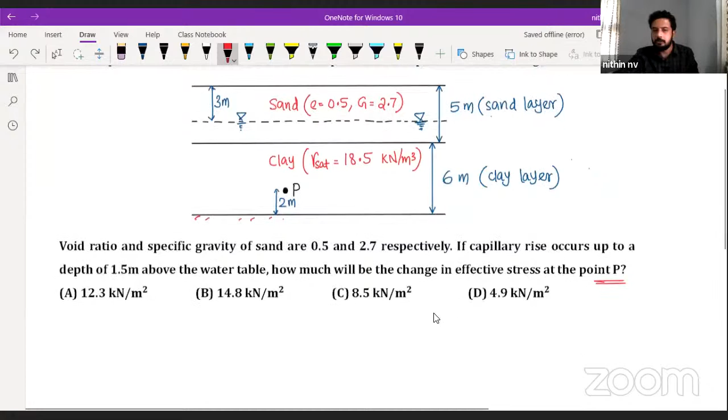Start solving it. So before capillary, no need to look at the screen, you can just solve yourself. Sigma Z is equal to - see, either you can simply put it as total stress minus pore water pressure, or directly you can put it. Or simply if I'm putting separately, you can just compare your step and understand where you made a mistake.

So gamma saturated we have to calculate now, gamma D also we have to calculate. For the sand layer, just calculate yourself. Tell me how much it is, everyone. Please tell me how much is gamma D. Can you please comment, everyone? How much is gamma D? Everyone please comment how much is gamma D.

17.65, okay thank you. So gamma W into G divided by 1 plus E. G value is given, E value is also given. So 17.658, okay. So which unit? Kilonewton per meter cube, na? In which unit you are substituting your gamma W, that will be the unit here. If you are taking 9.81, then kilonewton per meter cube.

Similarly, gamma saturated, what we have to do? G plus E divided by 1 plus E, na? So tell me how much is gamma saturated? 20, exactly tell me exactly. 20.928, okay thank you. Same unit, na? Kilonewton per meter cube, okay.

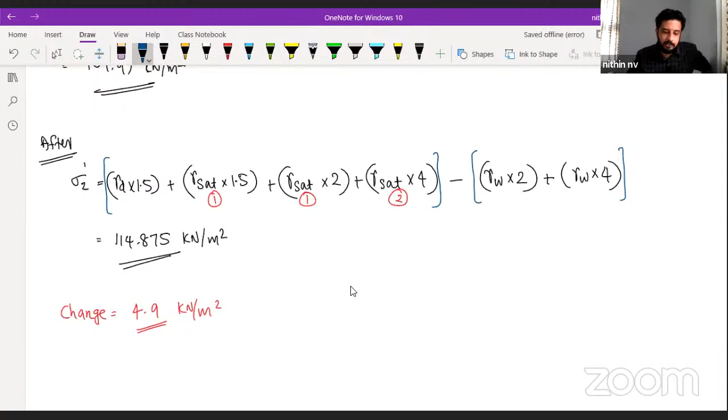What is the gamma W value? How much is gamma W? We have discussed in the first part, now not remembering. Unit weight of water - it can be 1 gram per cc, 1 gram per centimeter cube. It can be 9.81 kilonewton per meter cube. It can be 9.81 into, sorry, you can also put it in Newton, means into 1000, okay? That is equal to 9.81 into 10 raised to 3 Newton per meter cube. It can be 1 ton per meter cube. Anything you can substitute - only thing is in which unit you are substituting your remaining value, or in which unit you want the answer. That's it.

In the question, in the options, they have given everything in kilonewton and meter terms. So we are going to substitute - where is kilonewton and meter? This one, okay. So kilonewton per meter cube multiply with 1.5, and all is in meter. Meter cube and meter will get cancelled, we are going to get meter square. Clear? Okay, don't forget these things - very, very important thing. This is why I told the first part is more important. Foundation. Clear?

Okay. Very easy. So the only thing is, if they are not giving you the gamma D value or gamma saturated value, we just have to calculate from the given data. They may give the void ratio. See what this E and G are; I hope you already know. We have discussed these things in the first part, that's why I'm not discussing them again. E is the void ratio. G is the specific gravity. Using that, we have the equation. We have seen this equation before. Using the equation, we calculate it and substitute.

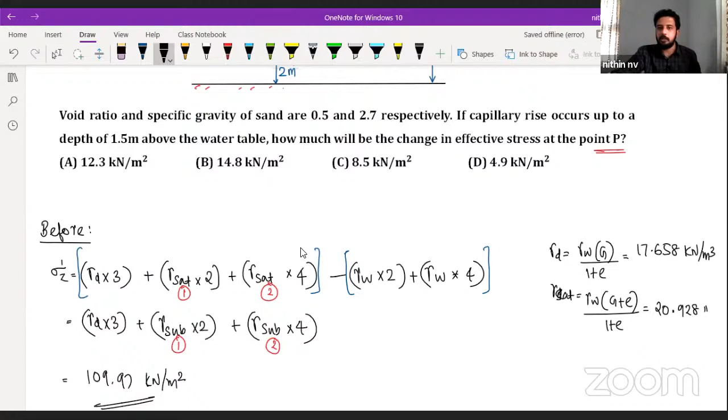Understood? Now see guys, if they are asking within the capillary rise portion, then what will you do? Right now they asked at this point P. At P, there is no capillary action. Capillary action is happening in that 1.5 meter portion. If they give you a point somewhere here, Q, or at the top, another point R, in that capillary region, if they ask what is the effective stress, then what do you have to do?

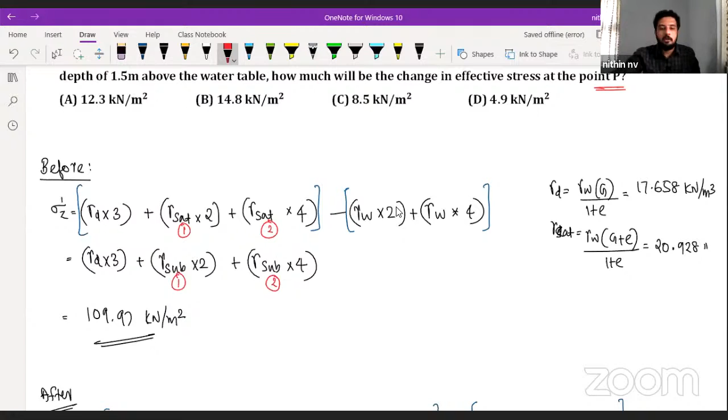Then you have to consider that portion in the pore water pressure. How much will it be? The pore water pressure will become negative. See, here it is a positive value. For example, you can do it as a homework; I don't have the data. Suppose this is the 1.5 meter depth, or in general, suppose this is the H value, that capillary rise portion. Now, if I draw the effective stress diagram in this portion, how will we get it? We have the water table here, just compare with the previous one.

Generally, we don't consider the pore water pressure above the water table. Here it was our P value, so we considered something like this: gamma W into 2 plus gamma W into 4, and that corresponds to P. Now, if they ask in this capillary region, sorry, I made a mistake. From here, here is our water table. We are going to extend this a little bit, drawing a pore water pressure here. It is on the left hand side, which means it is negative. Here the value is positive, 9.81 into 2 plus 9.81 into 4. Here it is negative, minus gamma W into H.

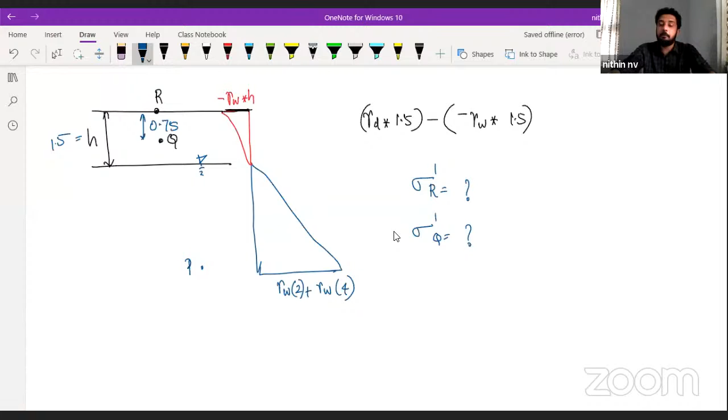Is it clear? Okay. Only in the capillary portion we are going to consider it. Clear, guys? But if they are asking outside the capillary area, we are not going to consider that portion in the pore water pressure calculation. Is it clear? Yes, very good. Okay. So I'm going into the next question. Yes. So let's see this question.

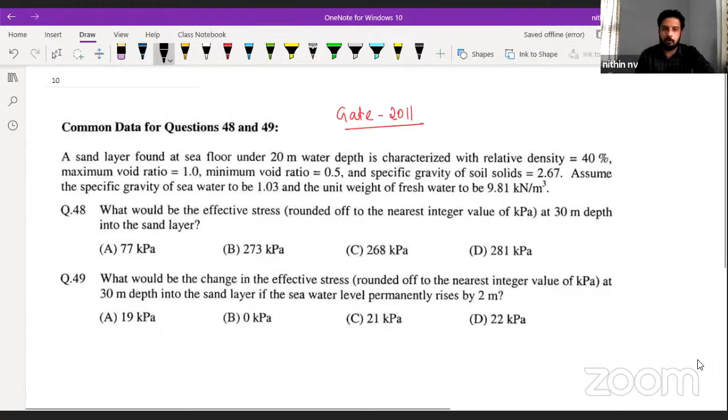No need to solve it completely. Just understand what is the change in this question. Everyone. What is the change? Is there any difficulty in this question if they are asking? This is actually a previous GATE question, GATE 2011 question. So we are not going to solve it. Just understand what is the change here.

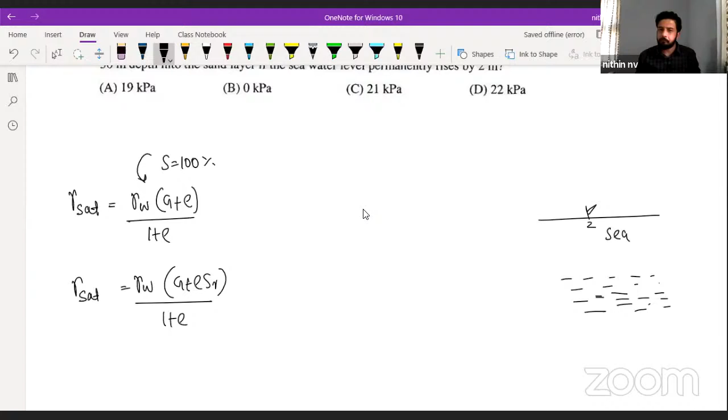If it is 100% saturation, if S is equal to 100%, the equation is going to be like this. So under sea water means what? We have soil here inside a sea, completely saturated. Then Sr is equal to 100% in this case also. What small change you have to make? If it is 100% saturation, gamma W into (G plus e), we just have to multiply with the specific gravity of that particular solution, let it be sea water, kerosene, whatever. You are going to get the answer.

Understanding? So if it is partially saturated, then also no problem. In this equation, you have to again multiply with the specific gravity. Now see guys, here we have to calculate the effective stress at 30-meter depth into the sand layer. Means we have seawater of so much depth. Here we have soil, this part is completely soil. They're asking what is the effective stress at 30 meters into the soil.

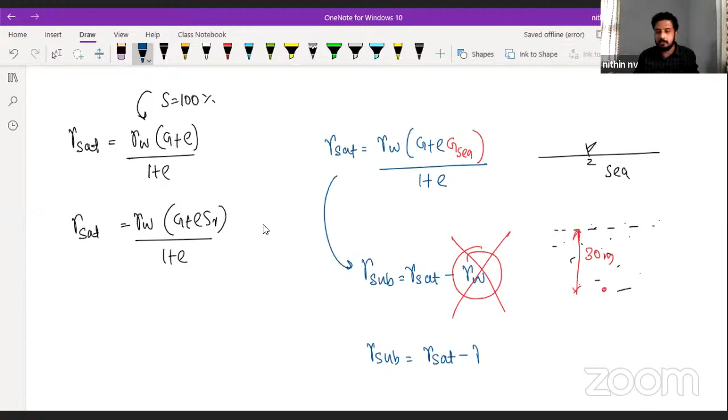So generally, at this point, we have to take gamma submerged into 30. The saturated value I told you. How can we calculate gamma submerged from this? Gamma saturated minus gamma W. Are you having any doubt? Is it clear? There should be a doubt because this is wrong. Why? We have already discussed that gamma submerged is equal to gamma saturated minus unit weight of whatever solution is there. So if it is seawater, we have to take seawater there. Is it clear?

In the sense, if you want to solve it, you can just quickly solve it and take the answer, no problem. What will be the answer? See, in this question, I told you before in the first part to remember relative density. So what they have done, they have not given the void ratio. Instead of that, they have given the relative density, maximum void ratio, minimum void ratio. From there, how can we calculate the e value?

Yes, everyone, tell me how much will be the e value here. Void ratio, everyone please tell me. We have already seen this equation in the first part. Those who missed the first part, you have to watch that first part.

Yes, very good. e is equal to 0.8. See, this is why I told you, you have to remember the relative density equation. Either they can ask you as a question, or like this, they can use that concept inside a numerical question. Clear? Yes, very good. I'm happy that all are commenting.

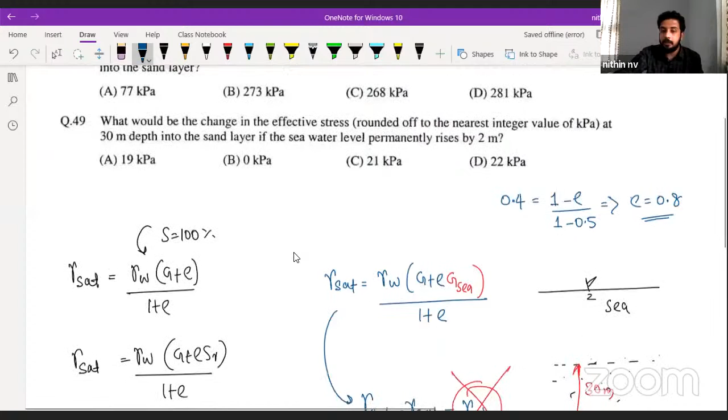Now see, we got the e value. Now how can we calculate gamma saturated? Just substitute and tell me how much gamma saturated you are getting. Everyone, gamma saturated is equal to, see here it will be gamma W, don't change that, G plus e into its completely submerged portion. So Sr is equal to 100%.

Then specific gravity. How can we calculate the specific gravity? They have given it in the question directly, I guess. 1.03. Specific gravity of seawater 1.03 is directly given in the question, last sentence. So tell me, if you are substituting, 9.81 into 2.67 plus 0.8 into 1.03, divided by 1 plus 0.8. Yes. So we are going to get 19.04. Thank you for commenting. This much we got.

Now tell me how much will gamma submerged be then? Gamma submerged is gamma saturated minus gamma of seawater. Tell me how much it will be? 19.04 minus, how to calculate gamma seawater? We know specific gravity of seawater is equal to unit weight of seawater divided by gamma W, unit weight of fresh water. Any specific gravity is like that. That's why specific gravity of water is equal to 1.

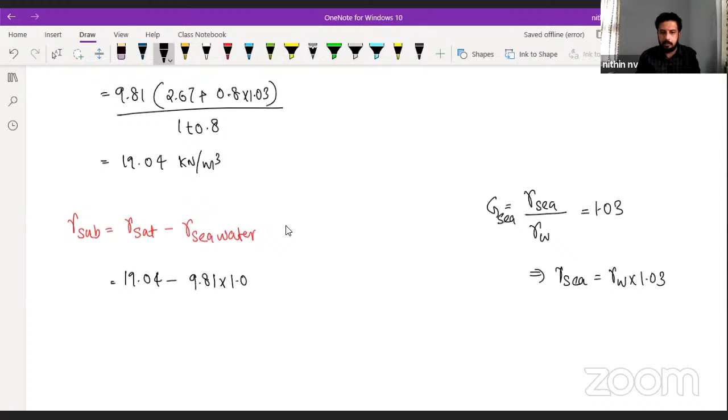That is given as 1.03, which means gamma seawater will be equal to gamma W into 1.03. So directly I'm putting it here, 9.81 into 1.03. So how much submerged unit weight are you getting? 8 point. Okay, thank you. Correct now? If you are taking 9.81, you are going to get the wrong answer. Vikash, properly check your answer. Something like 8.9, better you take the accurate answer. Is it clear, everyone? Kilonewton per meter cube.

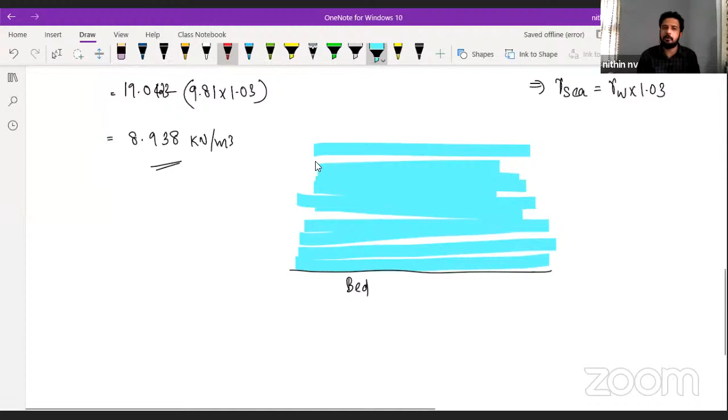Now, if they are asking about any water course, this is a very, very important point. For any water course, we will be having a bed level. Whatever be the depth of water, maybe the water depth is increasing again and again, whatever happens, whatever be your depth of water above the bed level of a sea or river or lake, what will be the effective stress at this location? Very good, zero. Very important point, can be asked. In this case also, effective stress at the bed will be zero. From here onwards, the effective stress is going to increase.

They are asking at 30 meters below into the soil. So how much will this answer be? Gamma submerged into 30 meters. Tell me everyone, how much is the answer? Very good, 268. 8.938 into 30. Are you getting approximately 268 kilonewton per meter square? Yes, very good. Now you understood how simple this question is. Kilonewton per meter square is equal to kilopascal. So option C is going to be our right answer. Is it clear, everyone? Yes, very good.

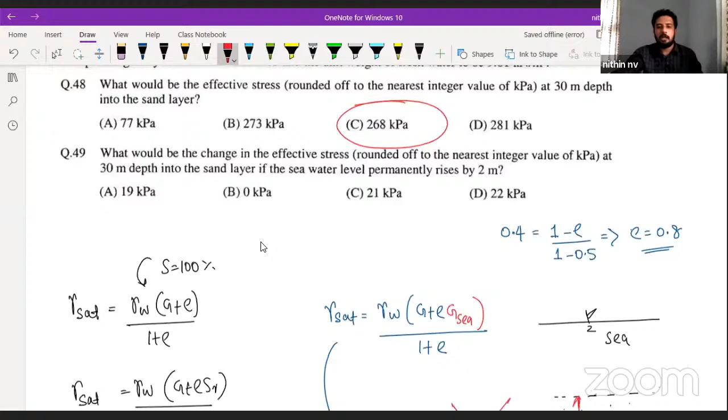Now you understood how simply we are going to calculate. They are giving something else. The actual procedure is lengthy; we have to calculate a lot of things and confusion will come. Now is it clear? Yes. Now tell me what is the answer to this second one. I have just directly snipped this question from the question paper. Tell me what will be the answer to the second one. Everyone please comment. Yes, very good. That's it.

Understood. So whatever happens in the water table, above the bed of the sea or bed of the river or bed of the lake, whatever happens, effective stress is going to be zero. That can be asked easily. Clear? Understood?

Now I'm going to give you another concept, something related to seepage and all. Just read this question and understand. Do you know how to do such question? This is another point where I generally used to get doubt. Just understand what we have to do. Please read the question properly, everyone, and understand what we have to do. I'm giving you a few seconds to understand the situation given in the question.

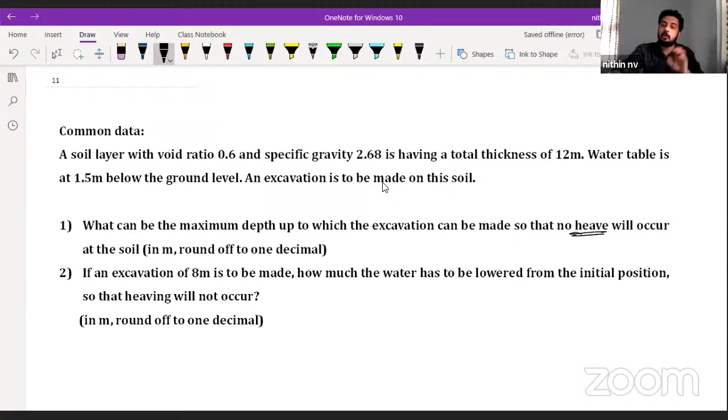Nothing, somewhat similar to our quicksand condition and all. We have to finally consider our effective stress concept - that effective stress is equal to zero. So if later the temperature increases, this water will melt also, somewhat related to freezing and thawing you might have studied. If you are seeing quicksand condition or heaving condition, just always remember we have to equate the effective stress equal to zero. This may not be due to seepage, this can simply be due to capillary action also.

So we are going to consider gamma saturated value and we are going to solve it. We can calculate it by taking gamma submerged also, but when calculating gamma submerged, generally students used to make mistakes. So I'm telling the simple thing - using gamma saturated, how can we solve such a type of question? This is a very important concept from competitive exams point of view. What they are telling - there is a soil.

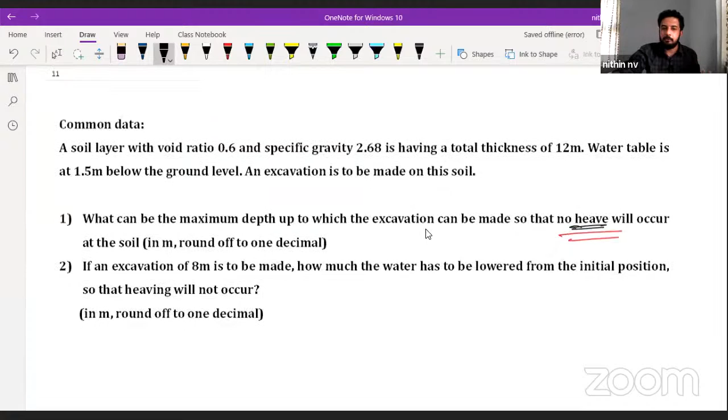In that soil, we have to make a dig, we have to make a dig. So how much we can excavate so that there will not be any heaving happening. So they are telling that it is a 12-meter thick soil. If I am simply drawing it, we have a 12-meter thick soil. So this is our soil. In this, water table is also there at 1.5 meters. If water table is not there, then we'll take gamma D and all. Simple as that. So 1.5 meter. Now what they are telling, we have to make an excavation.

If I am making an excavation here, somewhat like this, there is a chance that heaving may happen at this bottom of the sand. So right now we have sand like this. Till water table we have saturated sand. So this is sand only. Don't confuse with water table. Below here also we have sand, but we don't have sand here at this excavation portion. So here and all we have sand.

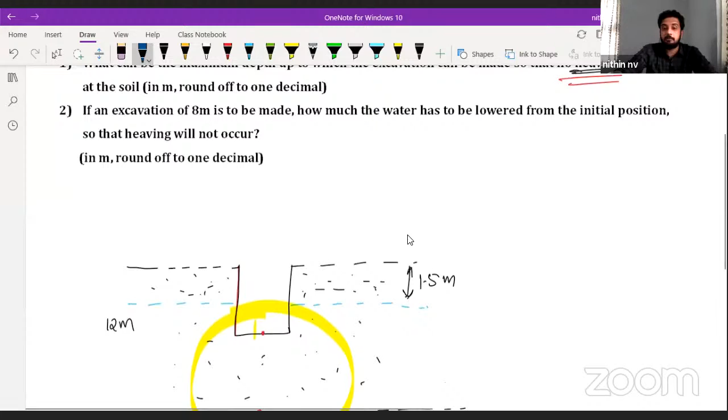Now see, if we are considering this point, how much will be the effective stress here? Exactly below the excavation, how much soil we have, that much portion we have to consider. So this is the portion under our consideration. Whenever they are asking how much can be the maximum depth of excavation, they will be giving you the void ratio, the specific gravity, whatever they are giving. We don't have to consider what is happening above or on the sides. Only just below that excavation portion, we have to calculate the effective stress. Under quicksand condition or heaving condition, at the critical location, we have to take gamma effective or submerged, and the effective stress is equal to zero.

Okay, so what we have to do, if I'm substituting 0, we just take the portion here. Gamma saturated into h minus gamma w into, how much will be depth of water table? I'm putting this as hw, height of water. Let it be the general case, hw will be equal to 0. But what we have to calculate is this depth of excavation. How can we calculate it? If you are getting this h value, 12 minus h is nothing but that depth. So do it.

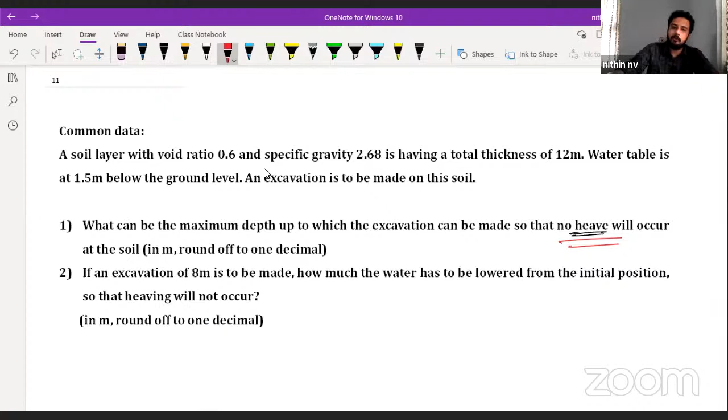Gamma saturated value we have to calculate from this. They have given void ratio, everything is given. So calculate it. Definitely that portion is underwater, under water table, so degree of saturation SR will be 1. Calculate gamma saturated and tell me how much it is. Tell me the gamma saturated value, everyone. Yes, very good, see, no need to calculate exactly how much it is.

Why? Because gamma saturated we know is gamma W into G plus E, when SR is equal to 1, plus E. You can simply put gamma W there, no need to calculate it, because gamma W is there here also. What I will get? Gamma saturated into H is equal to gamma W into height of water. Gamma W will get cancelled if I am substituting in terms of gamma W. Up to you. So tell me how much you are getting, everyone please comment.

Divided by 1 plus 0.6. If I'm simply putting gamma W there, I will be getting something like this. It's up to you, you can either calculate or put it like that. Into H is equal to gamma W into height of water table, which will be 12 meter minus 1.5, that is 10.5. Very good. How much? 5.1219. Okay, very good. So H is equal to 5.1219 meter. Okay, so is that my answer?

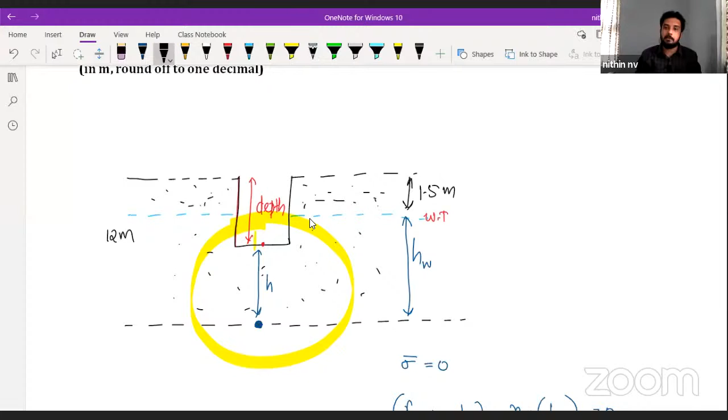Okay, so if they are asking, we can take gamma submerged, then also we can calculate, but finally you will get confused, so I'm not telling that. Simply remember, whenever they are giving a soil profile and asking what is the maximum depth up to which we can make an excavation. See, similar to this, there is another concept that we are going to study later: what is the maximum depth of unsupported excavation? What is the maximum unsupported excavation possible without any lateral support?

That we are going to study later in cohesive soil. There is a concept without giving any lateral support here, how much depth we can excavate. We have an equation like this: that will be equal to 4 into C divided by gamma root Ka. Like that, an equation we are going to study. Okay, that is different. That is what? Without any lateral support, how much depth we can make so that this soil will not come down.

You know, this soil will not come down, that is the meaning. Here, what? Here we don't care whether we are giving lateral support or not. Here we are considering for not happening a heaving process, how much should be the depth. So properly remember, okay, simply look at what is the maximum depth of excavation being asked. Don't go for a particular equation, check what they are asking. This is without lateral support, we are going to see that later, maybe in the next session.

And here it is, okay, I'm not rubbing it. Those who want, just check it. Now that is not required here, that is something extra point. So all are getting 6.8. Yes, very good, to discuss, okay. So many types of questions we are going to discuss in the coming time.

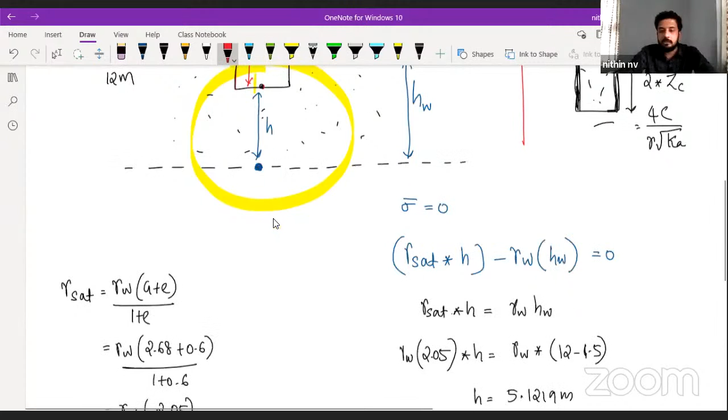6.878 meters. If you excavate more than 6 point something, what do we get now? Right now we have the maximum depth. If you excavate again, heaving will happen. The water will come to that location and finally problems will happen.

The soil will get collapsed, and the volume of the soil will increase. Whenever the temperature increases, it will melt, causing soil problems. If you construct a structure above this soil, the structure will eventually settle and fail.

Simple as that. Now in the question, we have to make it 8 meters, so something more we have to excavate. What do we have to do? Simply, we have to lower the water table, whether lower or higher, whatever it is. Actually we have to lower the water table if we have to dig more.

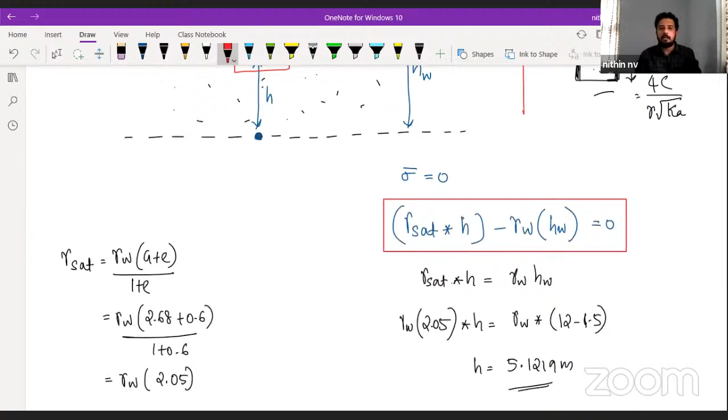So what do we have to calculate? If this depth is going to be 8 meters, how much should be HW? As simple as that, and we have the relationship. Remember the relation, it's very important. As of now, we have calculated H, and from H we calculated D. Now we are telling D is equal to 8 meters, so in this equation how much do I have to substitute for H value?

Vaishnavi, check your solution again, something mistake is coming. Tell me how much is H value, that might be the mistake. Everyone please tell me how much is H. Vaishnavi, tell me how much you substituted for H value. Is it 8 meters? No. Yes, very good, it is going to be 4 meters. So H is equal to 4 meters.

So gamma saturated we already got. Only thing is, instead of taking this 12 minus this thing, we just put HW there. So calculate HW, how much do we have to substitute? According to my calculation, I calculated like this: nothing but gamma saturated into 4 meters is equal to gamma W into, simply I'm putting HW. Everything I have, I just have to calculate how much is the height of water.

If I'm getting height of water equal to 8.2 meters approximately, yes, very good. Previously we had 10.5 meters from bottom. Now we understood it can be 8.2 meters, which means how much we have to lower using pumping out test and all. We have to lower by how much? The difference, how much is it? 2.3 meters, no? Okay, 8.199, yes very good, correct.

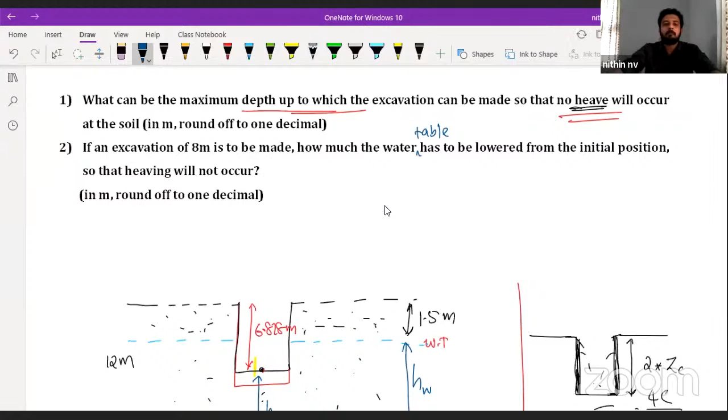So new height of water, HW, is equal to 8.2. So what is the question? The water table has to be lowered by how much? Now, how much the water table... so water table, okay sorry, water table has to be lowered. Understanding guys? Is it clear everyone?

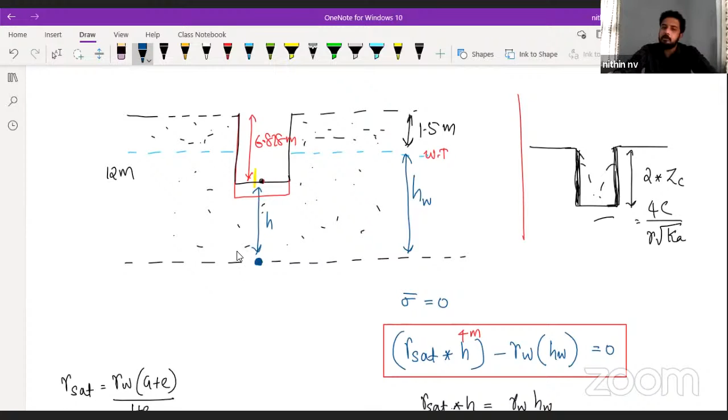In whichever point they are asking, they will ask like this only, say at the bottom of the layer. Whichever point they are asking, we can easily check what is the depth of water till that portion and what is the height of soil above that portion, meaning in that excavation area. If they give more depth or more layers, we can similarly calculate exactly the way we calculated in the effective stress calculation. Clear guys? Everyone clear? Yes, very good.

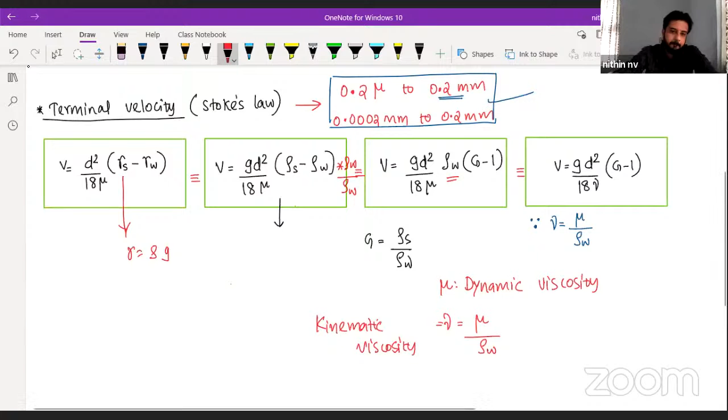If you simply multiply and divide this equation by rho W and rho W, what you will get: rho S by rho W will be our G value, and rho W by rho W is 1, so remaining is rho W only. Understanding, is it clear guys? Density, okay, not unit weight. So here only we made a mistake, and the fourth one was absolutely correct. Clear? Those who have seen the first part, is it clear? Those who have not seen it, in the first part, at the last portion when we were ending the session, I was telling you to check this, okay?

Okay, clear? Yes, those who missed the first part, don't worry, you can watch it later. Now let's go into the next question, one second. Yes, take this question everyone, understand what to do. Everyone, please read the question properly and understand what to do.

Hope you know the concept. Try to do it. After some time, I will explain. Start solving it, everyone.

Okay, can I solve? Okay Gurusaj, don't worry, we are going to make it clear. Don't worry, okay?

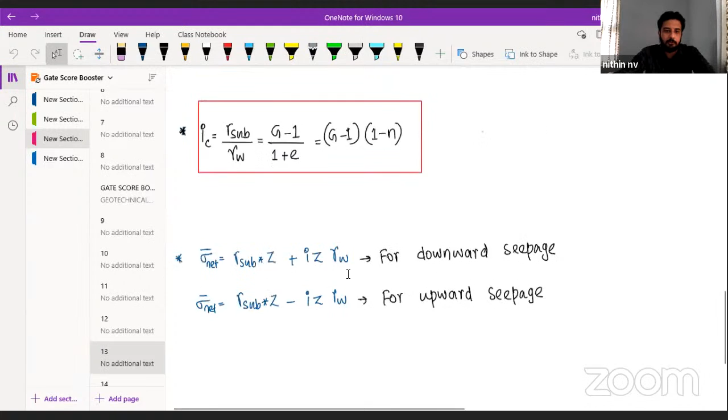Now K is nothing but... okay, let me see whether I have written all the equations or not. After this I will show you some other equations. One second, let me check... okay, no, I will tell you later.

Hope you understood. One second. Okay, let it be, I think my system got some problem. Okay, let it be, one second guys. Give me a second, please wait.

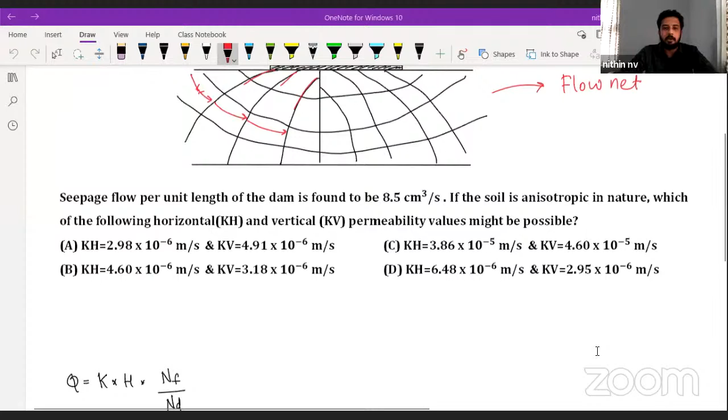Yes, I hope you can see the screen now, right? Okay, now see what you have to do. You just have to count how many drops are there. We got that equal to 9. How many flow channels are there?

Flow channel means what? That space in between the lines. How many are there if you check below? We have 3 lines. 3 lines means how many flow channels will be there? 1, 2, 3, 4 - 4 spaces. Are you getting it? Yes, very good. NF is equal to 4.

Clear? ND means how many drops are there? You have to count all the lines till that last horizontal portion. Flow channel means in between those horizontally going lines, how many spaces are there? So 1st space, 2nd space, 3rd space, and 4th space. So we got ND is equal to 9, NF is equal to 4.

Okay, so till that we can directly substitute. Now K is given - K is not given in the question, we have to take it from the options. We don't know right now what it is, but it is given in the question that the seepage flow is happening, which is equal to 8.5 centimeter cube per second. So the answer is already given. We have to calculate the K value there.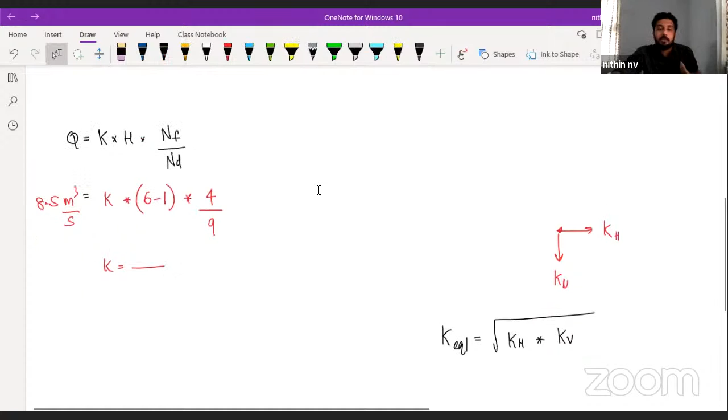Now we have to calculate how much will be KV, how much will be KH. How can we calculate? That is the next concept, and that itself can be a 1 mark or 2 mark question. For an anisotropic soil, the equivalent permeability is equal to root of KH into KV, as simple as that. But from this directly we cannot know or calculate what is KH and KV. What you have to do for such a question is, whatever value you calculated for K, then you check all the equations and see which equation is satisfying. That's it.

Now one thing, you have to properly check the unit. Here all the units are given in meter per second only, so this K is in meter per second, this H is in meter, so the Q value we are going to get is in meter cube per second per meter, actually meter square per second. The meaning is discharge per unit length, that's why meter cube per second per meter. If you are checking the unit, meter square per second it will come.

Clear? Now you just tell me which option is correct. Tell me which option you are getting correct. Yes, getting the answer, which one?

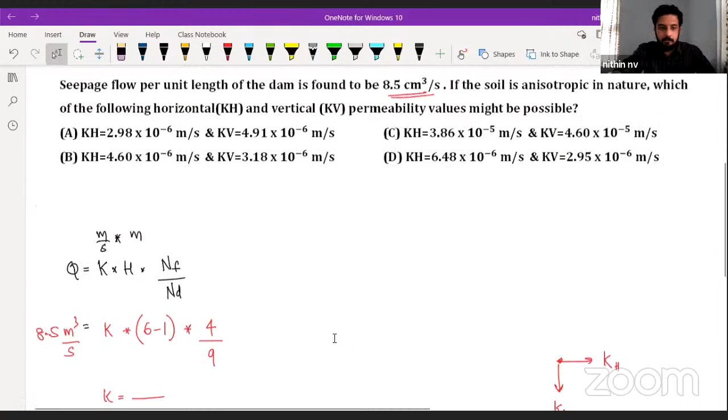A and B, is it? No, which option is correct? Are you getting A as answer? Seriously? Let me check for 1 second. I don't think you will be getting A.

Everyone please, how much are you getting for the K value? Can you please tell me? Okay, we'll check, don't worry. K is equal to 3.825 something. Are you getting 3.825? Okay, very good. So K value is equal to 3.825 into 10 raised to minus 6 meter per second. Okay, if you are getting A, okay, let it be there.

Now tell me, is there any other option? See, it can be MSQ, na? Which of the following is possible, that is the thing, na? So it can be that more than one answer is correct.

So you check it, properly calculate everyone. Those who are telling it is C is also correct, properly check into 10 raised to what? That is also important, guys. 10 raised to what? Okay, so this is wrong, into 10 raised to minus 6 is also there. If you are taking C option, properly check it, into 10 raised to minus 5 it is.

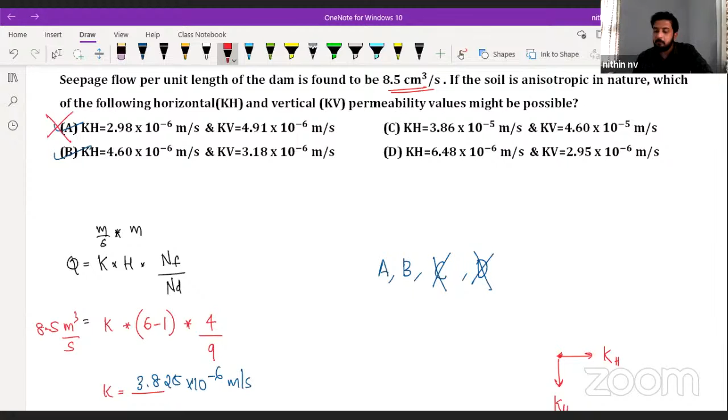Always remember, whenever we have an anisotropic soil, KH value will be always greater than KV value. This is very important point. We have KH value, the coefficient of permeability in the horizontal direction. We have KV value, the coefficient of permeability in the vertical direction. For an anisotropic soil, always in the horizontal direction, it will be more. So if you are checking option A, KV value is more than KH.

This can be something tricky that they are going to ask. So I just wanted to let you know that concept also. That's why purposefully I have made that option. Clear? See, these are the portions you have to take care. They will just try to make some tricky question to make you deviated. So now the only option which is going to satisfy the values and KH greater than KV will be option B.

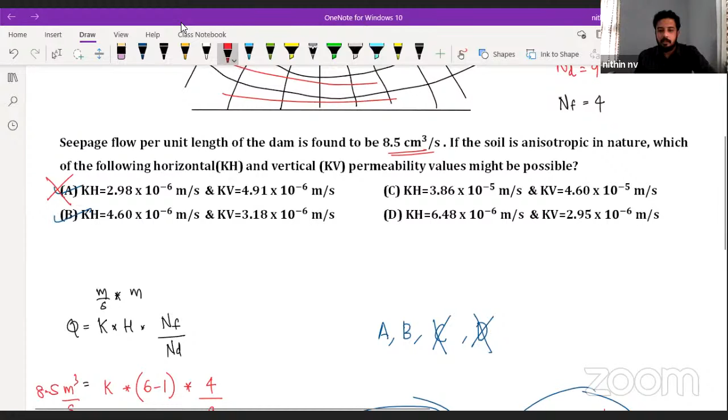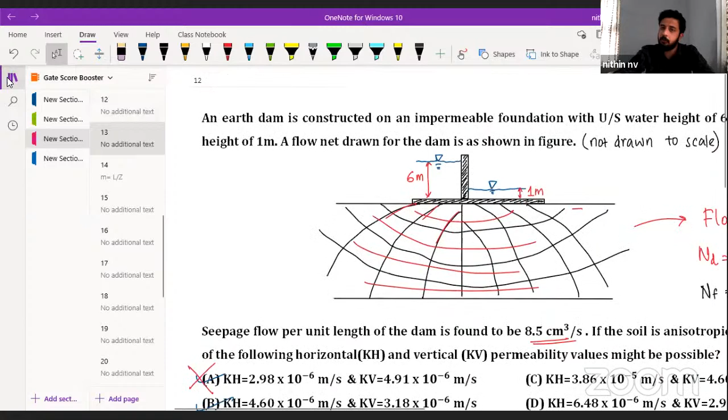Clear? So our only answer will be option B. Henna? Are you clear or not? Yes, very good. Understood? So this is one simple thing which you have to remember. Now I'm just showing you some equations that you can easily study, very easy thing.

Now suppose there is a soil layer and water is passing through it. So we have a coefficient of permeability value. We can easily take the flow Q is equal to K into I into A. You might have studied it many times in college exams. If we have more than one layer like this, then what to do? This K value will change. We have to take an equivalent K value.

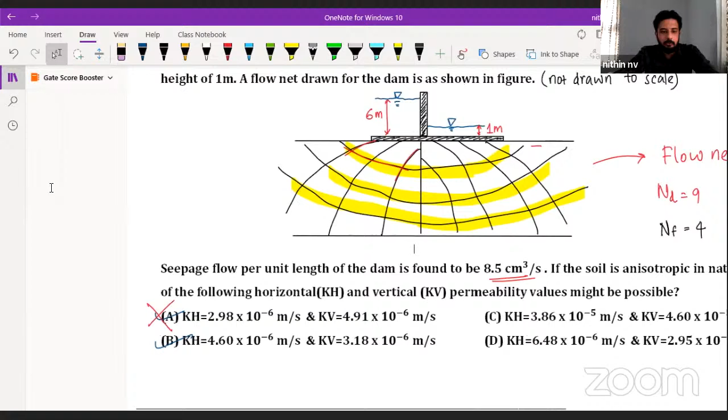Then there is an equation like this: K equals C D10 square E cube by (1 plus E) into gamma W by mu. The very important thing is, if they are giving you a particular soil, obviously void ratio and D10, also known as effective size, are fixed. C is a constant. These are soil properties, and gamma W by mu is nothing but the

fluid property. If it is water, then water. If it is kerosene, then kerosene, like that. This is water property, or we can simply say fluid properties. This is soil property. So for a particular soil, K will be directly proportional to gamma divided by mu.

Instead of gamma W, I can simply put gamma. If it is water, then gamma W. If it is kerosene, then gamma of kerosene. If it is seawater, then gamma of seawater, like that. Clear? This is not gamma of soil. This is the gamma of the fluid. So this you have to remember.

They can ask, if you are taking a different fluid of different viscosity, and they can give you gamma correspondingly, what will be the coefficient of permeability. Then using this equation, you have to calculate the K value, if you don't have any other data.

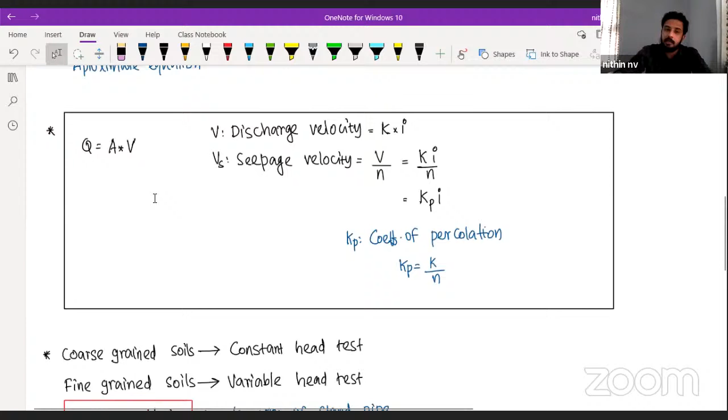This is something we have already discussed. Q is equal to area into velocity, I told you in hydrology. Discharge velocity is K into I; seepage velocity is discharge velocity divided by porosity. They will give you the void ratio, or the relative density, from which we calculate the void ratio and then porosity and substitute here. Like that, they can ask you a 2-mark question.

Now if they give two points and ask how much time a tracer, a water particle, will take from location A1 to B1, with the distance given, we know time is equal to distance by velocity, because velocity is equal to distance by time.

Which velocity we have to take? Should I take discharge velocity or seepage velocity? Everyone please comment. Very good, seepage velocity we have to take. That is very important to remember.

The same thing they can ask in hydraulics also; I told you this there, I guess. Yes, Krishna Kasturidas is already giving the answer. Very good. Inversely proportional we used to take. I will tell you later.

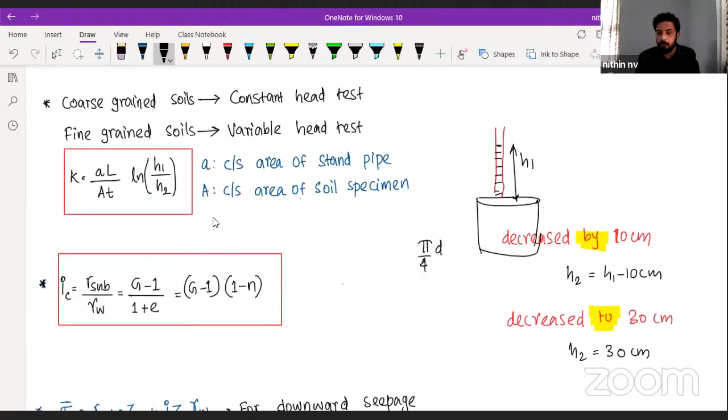Then small a and capital A, they will give in the question. Definitely the capital A value will be bigger; we have the soil here of bigger diameter. Either they will directly give the area, or we can calculate it by pi by 4 d square, if they are giving a cylindrical specimen. Length they will give in the question itself. We can properly substitute everything.

Remember, it is natural logarithm. Or somewhere you will be seeing the equation 2.303 aL divided by capital A t, but then it will be log H1 by H2. That is also the same. Don't get confused if you see an equation using 2.303; both are same. Clear? Shape factor is nothing but related to D10 and C. And also we have C, a constant which takes care of the soil properties. Clear?

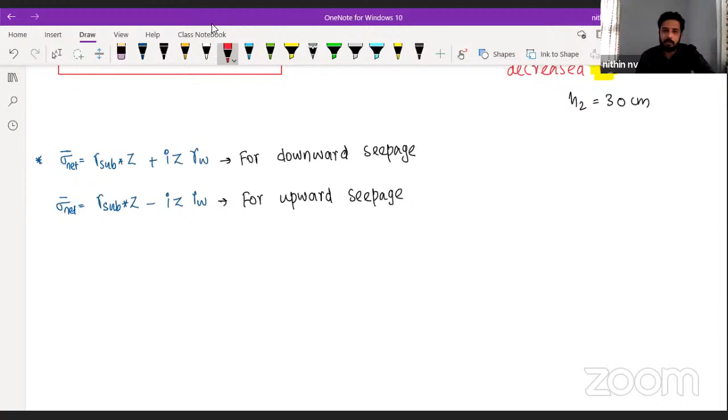Now, this is the downward seepage and upward seepage. Very simple thing. Maybe in last year's GATE score booster session, sir solved a question based on this equation also. You can just practice; as of now we have already calculated this, that's why I'm not explaining too much. Simply a direct equation. Only thing is, for downward seepage we have to use a plus value. For upward seepage, we have to use a

minus value. Suppose we have a soil here. If you are connecting two piezometers somewhere, we'll be getting two heads. Suppose some head we are getting like this. The difference between these two values is nothing but our head loss. So if this is your head loss HL, and this is the length you have traveled, the hydraulic gradient I is equal to that loss in head divided by L.

That piezometer we can keep anywhere, at top or bottom. We assume the I value as a constant value. So wherever you are connecting, you just check the difference between the piezometer levels, and divide that value by the length between the connected points. So you are going to get I. Sometimes the bottom portion will be higher; it depends on the flow.

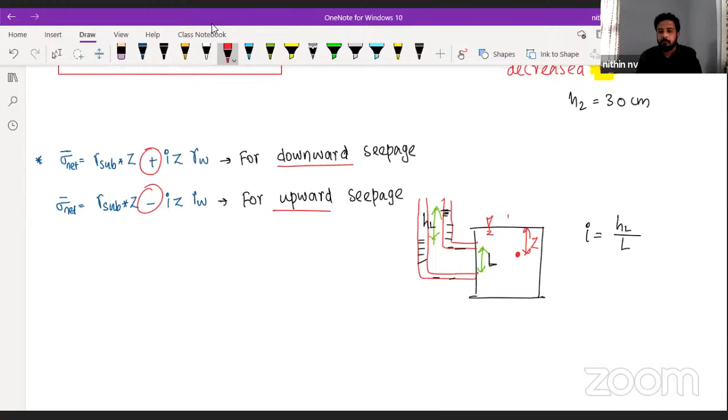If they are asking at any point Z meter below the top of the soil layer, and seepage is not there, we know the effective stress is gamma submerged into Z. Now if seepage is happening, if it is downward seepage, then we have to put plus I into Z into gamma W. If it is upward seepage, we have to put minus. That is why we are getting a quicksand condition sometimes.

We get a quicksand condition whenever sigma dash is equal to 0. So if they are asking at what depth quicksand condition is happening, we can simply equate this equation and calculate it. Clear, guys? This is once again gamma submerged into H.

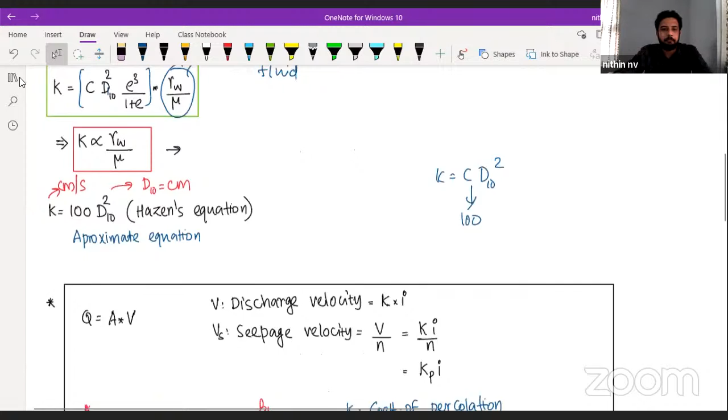That covers the things we have to check under permeability and seepage. Before showing the next question, I will give you some points, and after that we can go to the next question.

Next concept is stress distribution. Whenever we have a point load, we have two equations: Boussinesq equation and Westergaard equation. In the recently updated syllabus, they have removed the Westergaard equation part, so this time they may not be asking it. At least remember it's simply the equation changing - instead of 5 by 2, it will be 3 by 2.

And instead of 3 by 2 pi, it will simply be 1 by pi. There's also a slight deviation in gamma Z that you can check. But this time they may not be asking it - generally they don't ask the Westergaard equation, only the Boussinesq equation. They may not even mention it's Boussinesq - they will simply ask, and by default we use the Boussinesq equation.

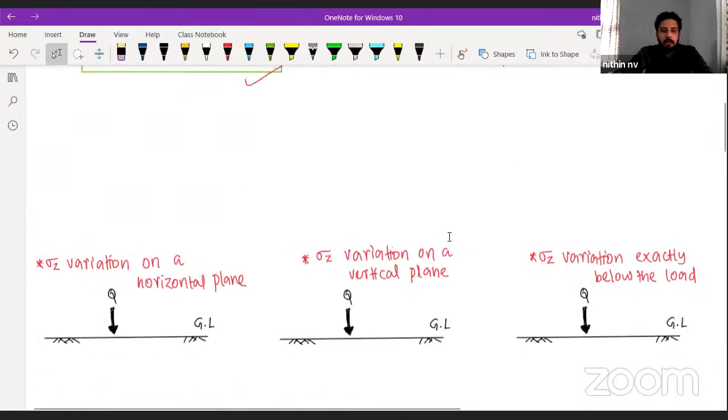Now this is not that important, simply listen. If you take a particular horizontal portion at Z meters, the variation as R value changes will be somewhat like this - you get the maximum value at R equal to 0. As R changes, the sigma Z value keeps decreasing. Contact pressure, I will tell you that also, please wait.

This figure they can give as an option and ask you what is the exact figure - like in transportation where we studied the Marshall graph. They can simply ask which of the following is the correct graph representing the vertical stress, sigma Z, variation on a horizontal plane - meaning Z value remains the same but R value changes as we move left and right.

Now, sigma Z variation on a vertical plane means you keep the R value constant. Suppose I take a particular R value - applying the load at a sidewise distance, and throughout that vertical line downward, I check the variation.

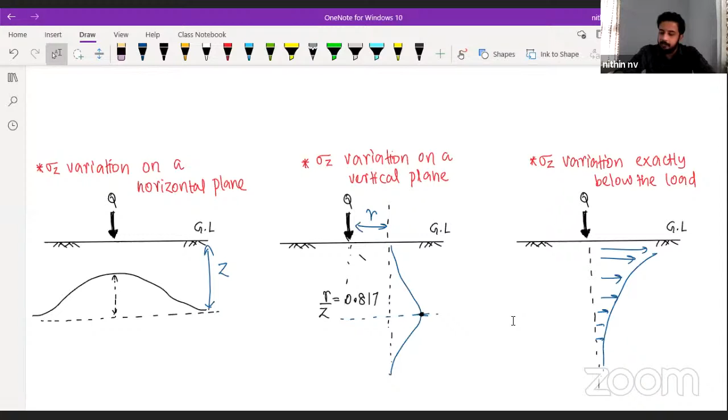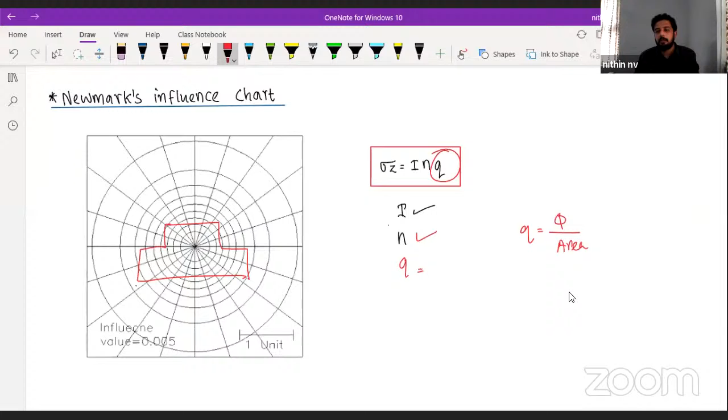Only the unknown portion will be this Q value. Either they can give some load, or they will give the area of the footing, so Q by area, you will be getting the intensity value. That's all, a very easy thing that you can easily substitute.

How are we going to calculate Q? They will give it in the question, or they can give the load value, and we can divide by area to get the Q value. This I value we are going to take from a particular table, which I will explain through a question. Clear? Now we will do a question.

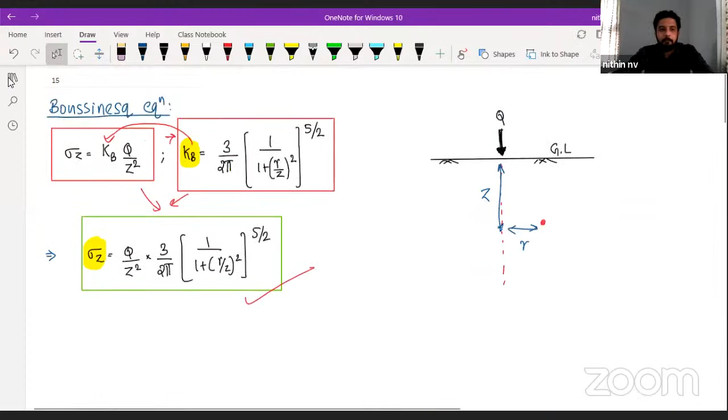You just take this question, yes, do it. The circular equation I have already told you; just check the circular equation and substitute it, and tell me how much you are getting for the circular case. Properly check the question, what we have to do, and tell me how much you are getting for the circular one.

Substitute the equation. Either you can use that 1 minus cos cube theta, or you can directly substitute in the other equation.

First you calculate the circular one and tell me what is the answer below a circular loaded area.

Very good, very good, Krishna. See, what will be the Q value, everyone?

What will be the small Q value? 4 meter dia, na? So 4 meter diameter means dia is 4 meter. What will be the Q value? Load is given as 1500 kilonewton. Intensity of loading it is, na? So pi by 4 d square.

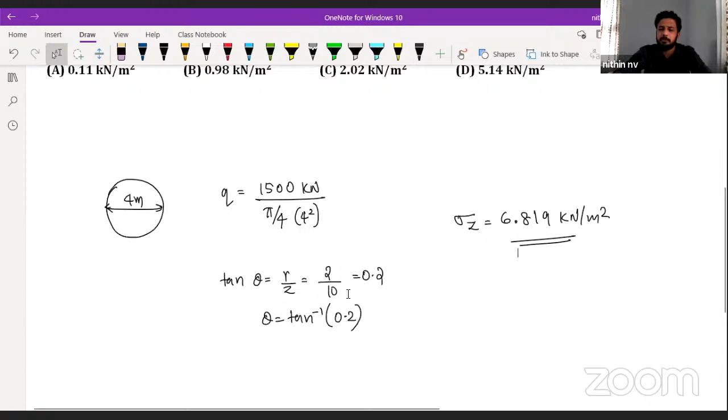Yes, either you can do with that equation or the first equation, anything, both are going to give you the right answer. But in online calculator, it's better to do using the theta equation, otherwise so much of brackets and all you have to put.

Okay, now coming to this is what I told you. What they have given: the foundation is, first of all, we have a circular diameter foundation. Later we are replacing with a square foundation of 4 meter side, which means it can be either rectangle or it can be a square to use that particular equation which I have shown you last. So everywhere it is 4 meter. Now what we have to calculate, they are telling at the center at a depth.

So if I'm just drawing like this, as of now we know only one thing: at the corner, at a particular value of z, we can calculate. Now they are asking at the center, at the value of z - what to do? What we can do? If they are asking at the corner, directly we can apply the equation. If they are asking at the center, what we can do?

We can split this square into 4 different squares, so that now this point is going to be below the corner of 4 different small squares. Understanding, guys? If I am splitting this square into 4 different parts, okay, either it can be a rectangle or it can be a square. If I am splitting into 4 different parts, what we are getting? Now that point has become at the corner point of 4 different squares.

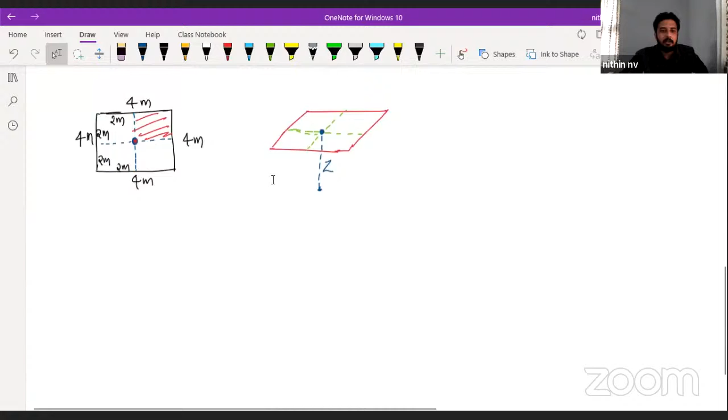Length by z? For each rectangle, this is 2 meter divided by 10 meter, that is 0.2. Similarly, breadth by z: B by z is also 0.2 because it is a square. If it was a rectangle, we would get a different value. We don't care which is m and which is n. So here we are getting 0.2, 0.2, corresponding to 0.2, 0.2.

Which value do you have to take? Yes, the first one. By mistake, don't take 0.4, 0.4. Because we have already split it.

Now remember one thing: if the m value is, for example, 0.5, and n value is 0.2, you need that combination's answer. For example, this is what you require in the question, but it is not available as such. They have given 0.2 and 0.5. Let it be any combination they are giving, then what will you do?

In the question, suppose we require a combination of 0.5 and 0.2, we need that influence value, but it is not given directly; instead they give a 0.2, 0.5 combination. Then what will you do? Will you take 1 minus the given value, or take it as it is? Will you interpolate? Don't do anything. This combination only you have to check.

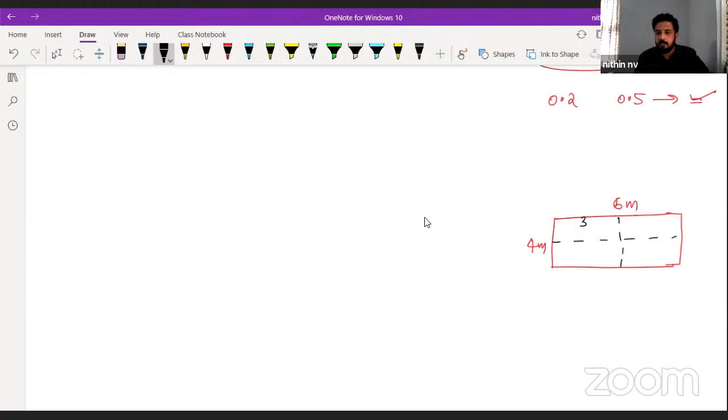If they are giving a table, for example, there is a rectangular area, this is 6 meter, this is 4 meter. Now if you are splitting it, what will you get? This has 3, this has 2. Now suppose that is equal to 10 meter, what we require is the combination of 0.3 and 0.2. We require this, but in the question they have not given this directly; they have simply given a combination like 0.2, 0.3 equal to some value, say 0.02 something, 0.231.

Then what do you do? No need to do anything, simply take it as it is. The M and N combination only you have to check. This may not exactly be this value; there is a particular predefined value for all the M and N combinations. We just check the M and N combination.

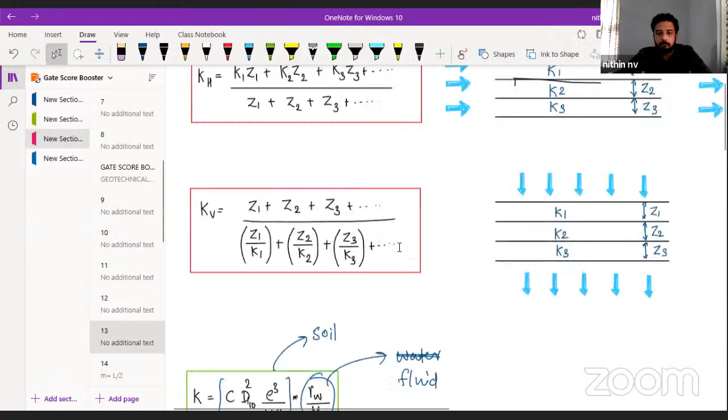So here it is 0.0179. Substitute there: sigma z is equal to 0.0179 multiplied by I into Q, using the equation we already wrote. I showed you where it is written. I into Q, the Q value we already calculated as 1500, divided by area.

Now tell me, what is the answer for area? Is it pi by 4 d square? That's it, now it has become a square, right? So as of now, what did we calculate? Yes, 16. And the Q value. Now what do we need to do, guys?

What will be the intensity of loading? Should I take 1500 divided by 4, or should I take 1500 divided by 16? Which is correct? Don't make a mistake, don't take 4. It will be 16 only, okay?

Because the total area is 16 meters square, and our load of 1500 came on this 16 meters square. So what will be the intensity of loading here? It will be 1500 divided by 16 meters square. So everywhere on this 4 meter square small rectangle also you are getting the same intensity.

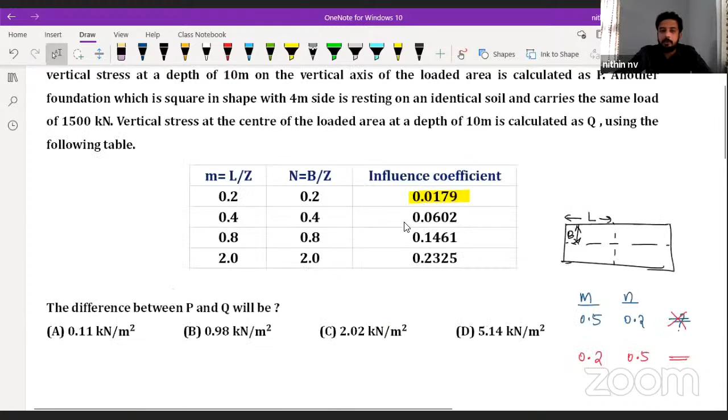But here, whenever it is at the center, whether it is a rectangle or a square, we are getting the same portion for each. So directly what can we do? Our sigma z value will be equal to - no need to add it separately - just multiply with 4. That's it. Are you understanding, guys?

Now tell me the value, sigma z. Multiply with 4 and tell me. 6.7125. Okay, thank you. 6.7125 kilonewton per meter square. Right.

Getting it? So what is the question? What is the change? What is the change that happened? It was 6.819, now it became 6.7125. So how much is the change? It is 0.107.

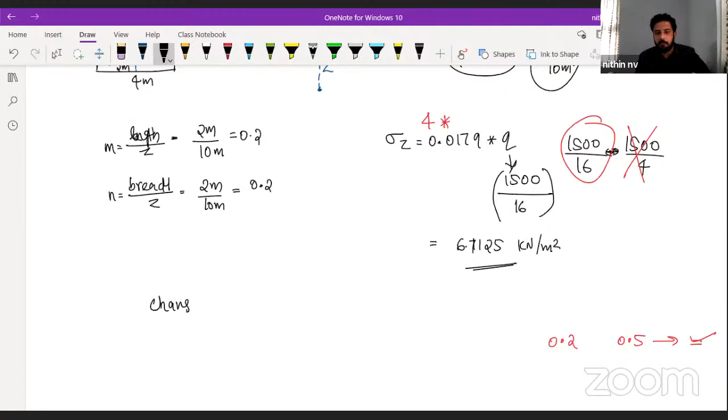Huh? 0.107. Okay. Kilonewton per meter square. That's it. There is a small change only, na? Yes, 10 something. So which option I have to select? Which option I have to select? Yes, very good. Option A. Clear? Is it clear, everyone?

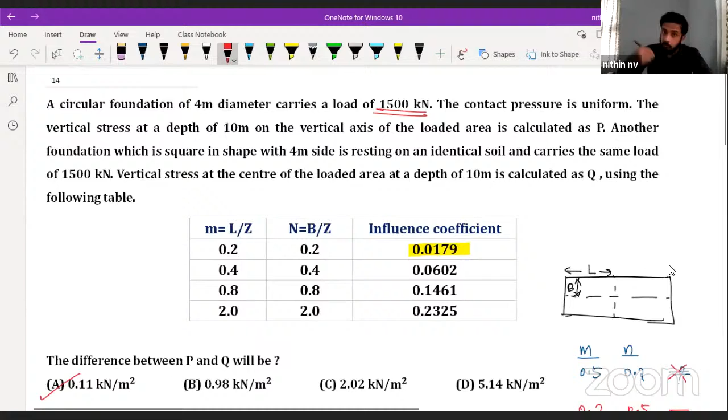Properly check it, okay? The only thing they can make here is one thing is by like this. I have already given you the load. If they are giving you the intensity, you may not make mistake. But if they are giving you the load, you may make mistake here. Okay, so by dividing, take the total area. That's it. That is the only thing.

Then if it is a square, then the combination only you just check M and N. If they are giving opposite, then also it will be the same value. Clear? Right. So those things you remember. Now, yes, take this question.

One second, before going into the question, I will just show you the equations of settlement and everything. I will tell you, contact pressure, those things I will show you. Just take a screenshot. I hope you have already studied consolidation. There are important equations. We are going to use these equations in the question. If you want, you can just take a screenshot or just go through these things. Again, I will take these equations and I will show you this.

For ultimate settlement, we have different equations. Any equation you can use. If they are giving you the coefficient of volume compressibility, we can use the first equation. If they are giving you the change in void ratio, total thickness, initial thickness, this H is nothing but the initial thickness. Okay. Then also we can use the different equation and calculate what is the final settlement. SF, I mean SF by settlement final.

Okay, final settlement. Sometimes in the material you will see delta capital H, or you can use this equation H into CC. CC is nothing but compression index. Compression index is nothing but if you are actually increasing the effective stress, void ratio decreases. We are going to get a curve like this. If you are taking the slope, somewhere E2 minus E1 divided by effective stress sigma dash 1 minus sigma dash 2, we are going to get this guy. Okay, nothing but coefficient of compressibility. This is not coefficient of consolidation. This is coefficient of compressibility.

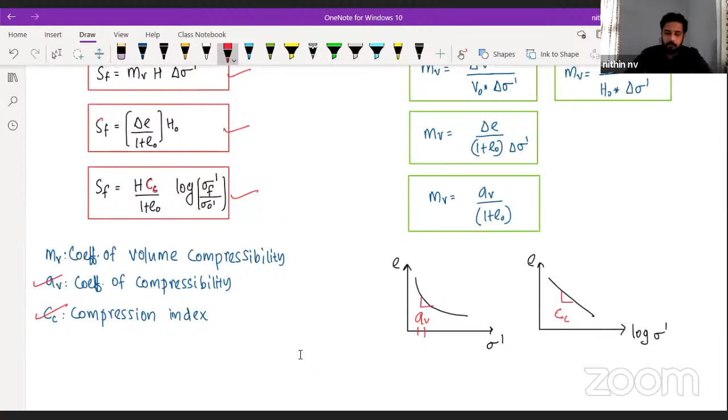If CC value is not given, either they can give a graph like this from where we have to calculate, or they can give that it is a remolded clay or undisturbed clay, from where also we can calculate. I'm going to give you a question, you will understand. Okay, so these portions also you remember. Either they can give you the AV value, E0 value and all, and they can ask you what is the final settlement if the increase in effective stress was this much. Okay, we can easily calculate.

Now here I have written sigma final by sigma initial. Effective stress, this is final means what? The sigma F value I can also write as the denominator value plus change in effective stress. Initial value plus change in effective stress is nothing but final value. So these things you remember, we are going to use this.

Then a very important thing, time factor, which is denoted by TV, T suffix V, time factor. Equation is same, CV into T by D square, where CV is nothing but our coefficient of consolidation. T is nothing but the time that we are taking. D is nothing but the drainage path. Very, very important thing. I will tell you when we are discussing the question. Okay, let it be there.

CV value, if they are not giving, CV is what? Coefficient of consolidation. What was coefficient of compressibility? That was AV that we have drawn in the graph. This is coefficient of consolidation. If they are not giving, coefficient of permeability divided by MV.

We have seen in the previous one: mv, coefficient of volume compressibility, into gamma w, nothing but our water. So this equation is the same for any degree of consolidation, and you can equate it to another equation. What is that equation? If the degree of consolidation is less than or equal to 60%, we have a very simple equation, pi by 4 U square.

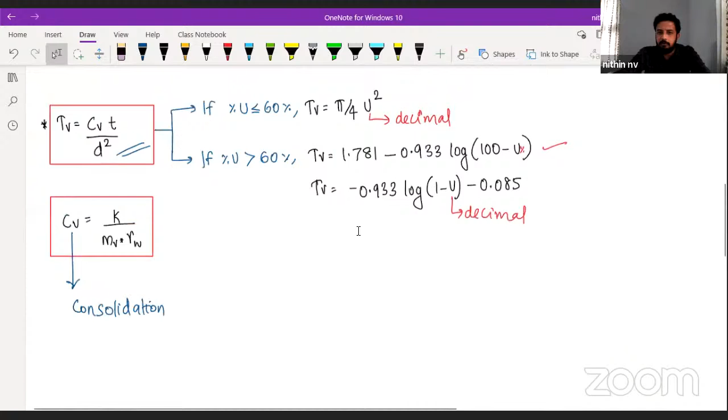We can do a question now. Using the question we can understand the equation in a better way. So you just take the question, understand what is given. It's a lengthy question, so I have split it into 3 parts. Each part can be a 2-mark question, like that. Properly go through it and understand what we have to do. I'm giving you a few seconds to understand the question.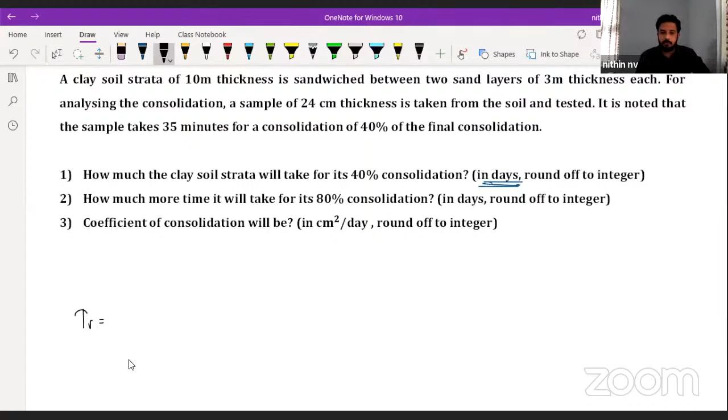We have to calculate the time. So whenever they are asking how much time it will take, means in days, how much time. In consolidation, whenever they are asking how much time it is taking for some particular degree of consolidation, always remember we have only one equation for calculating the time, nothing but Tv. Yes, very good. Tv, what is the equation?

Cv t by d square. So if they are asking how much time it will take, either they can give you the Tv value, d value and Cv value, then ask you the t value. Or they will not give you the values, and from the given data we have to calculate. Now, they have not given the time factor in the question, no? Are you seeing any time factor equal to 0.1, something like that? Nothing. Now, either I can use the pi by 4 U square equation, or I can use the second lengthy equation.

Which equation can we use? Very good. It is 40% consolidation, which means it is the first one. Tv is equal to pi by 4 U square, as it is less than 60%. So tell me how much you are getting for the Tv value? 0.1256. Okay, thank you. So we got the left hand side: 0.1256 is equal to Cv t by d square.

Now, if they are asking how much time it may take for 70% consolidation, then it is greater than 60. We have to use the other equation and calculate the Tv. Clear? That is how we are using the Tv equation. Now, this right hand side is common for any degree of consolidation. Cv t by d square is common.

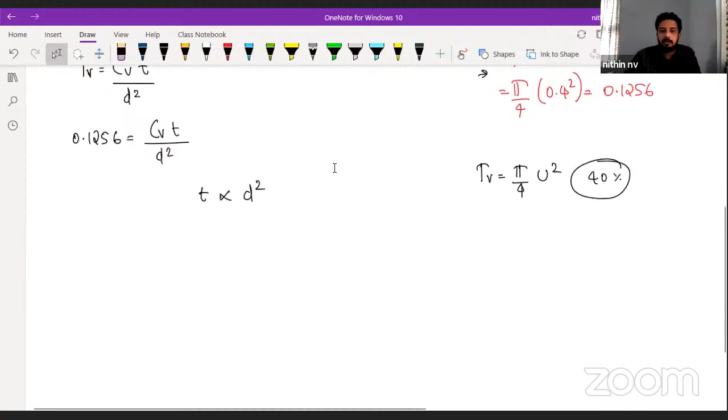And what is remaining? T and D are remaining. What will we be getting? T directly proportional to D square. Clear now? Now what have we taken? A 24-centimeter sample. Now look at it. What are they giving? We have a clay layer of 10 meter, with 2 sand layers of 3 meter thickness.

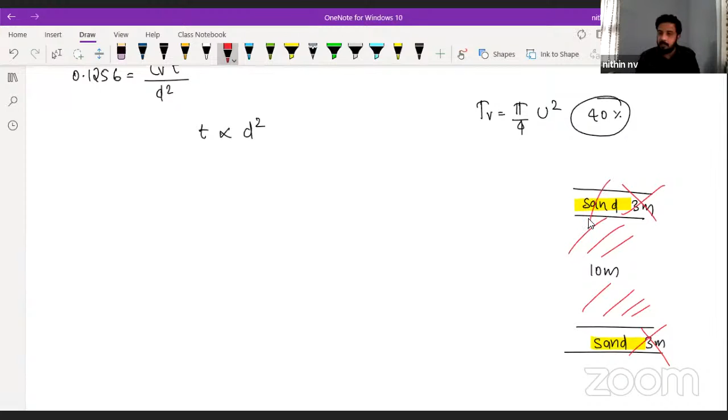A 10 meter clay layer is there, and we have sand here which is 3 meter, and sand here which is also 3 meter. Where are you going to use this 3 meter? Very good, not used. That is just for confusing you. We require only our layer. What we require is which type of soil it is. If it is sand, sand is permeable, so definitely we'll have drainage on both sides. So D will be H by 2, equal to 5 meter.

Suppose on one side they say it is a complete rock portion. Then we'll have drainage only on one side, and D will be equal to 10 meter. If we have drainage on both sides, either they will say it is a double drainage layer, or that both sides are sand, or that both sides have a permeable layer. Or they can say one side is permeable, the other side impermeable. If both are permeable, divide by 2. If only one side is permeable, take it as it is.

So here they have given sand on both sides, which means we have two-way drainage. So for the particular clay layer, what we want to calculate is T2. For the sample, it has given 35 minutes. So T2 by T1 is equal to D2 square by D1 square, since T is directly proportional to D square. For this soil, we got D equal to 5 meter. So 5 square divided by... now 35 minutes corresponds to our soil sample of...

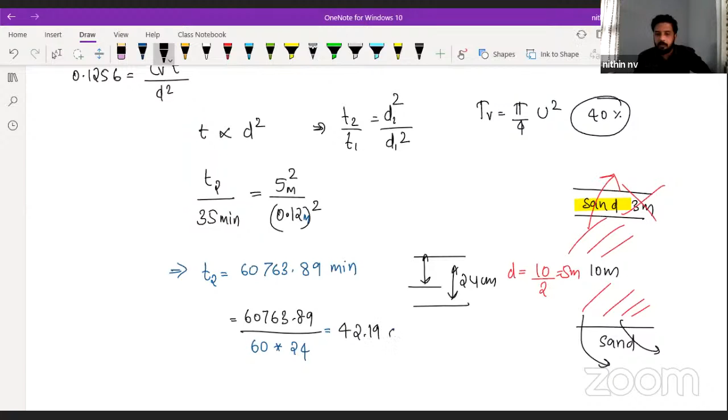How many days? 42.197, is it? Everyone please check it. 42.19, are you getting the same? Understanding, everyone?

Yes, okay, so always check it. If they are giving you the TV value, then directly we can calculate it. If they are giving you the CV value or TV value - TV they may not be giving - then they don't have to ask anything, now directly we are getting. So look at CV value. If CV value is not available, then look at whether they have given any sample or not. Definitely it will be there.

If that is also not there, look at K value. If they have given the K value, where I have written the equation I have shown you now - see, MV equation or CV equation, they can give K value, MV value and gamma W value. If they are not giving MV also, we can calculate it from here. So like that, you have to go. According to the given data, you have to calculate.

Now the second thing, we may take some 5-10 minutes more. How much more time will it take for 80% consolidation? So what you have to do? I told you, the only equation we have to check the time taken is the TV equation, CV into T by D square. Now they are asking for 80% consolidation. Now can I use this equation?

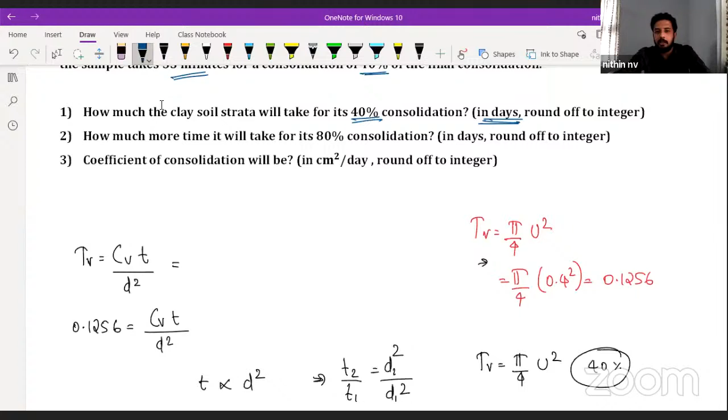Pi by 4 u square? Can I use the pi by 4 u square equation? No, because it is 80% consolidation. So if it is 80% consolidation, what we have to do? Till here it is same.

TV is equal to CVT by D square, this is common for everyone. The second equation I can use for greater than 60%. Which equation I have to use? 1.781 minus 0.933 log of 100 minus u - that equation. Okay, any equation, log of 100 minus u, any equation you can use. Any equation you use, calculate and tell me what is the answer.

If I am using that one, 1.781 minus... okay, you can calculate using the other one also. Once I'm using this, it should be 80. How much are you getting for the TV value?

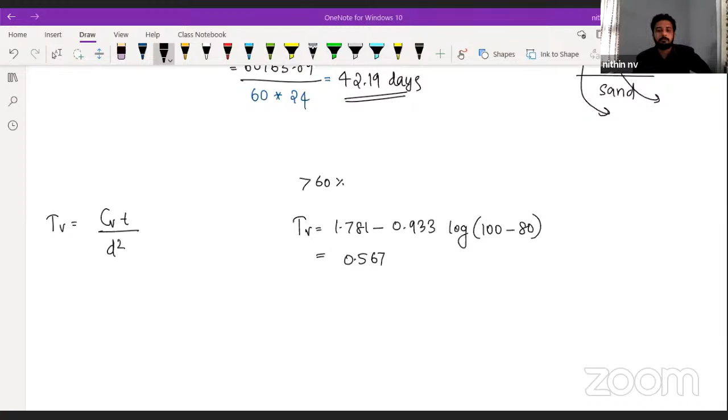Everyone please comment and let me know. Are you getting the same answer? Are you getting the same answer? Yes, getting now? Okay good, now see what you can do.

What they are asking for 80% consolidation - how much more time will it take? So same clay layer, same layer means what? D is same, CV is also same, everything is same. Only thing is we have to check - we got right now corresponding to a TV of...

40%, we got 0.1256. TV was 0.1256 corresponding to a time of how many days? 42.19 days. Now what they are asking - see, we understood this is a particular type of soil, and for the same soil they are asking.

So CV is constant, D is also constant for a particular soil, so TV will be directly proportional to time. Simply we can take it like that. Now they are asking what will be the time for the next one if TV is equal to... as simple as that, we can calculate now. So T2 by 42.19 will be equal to 0.567 divided by 0.1256. Correct now? Now you tell me, how much will be this T2 value?

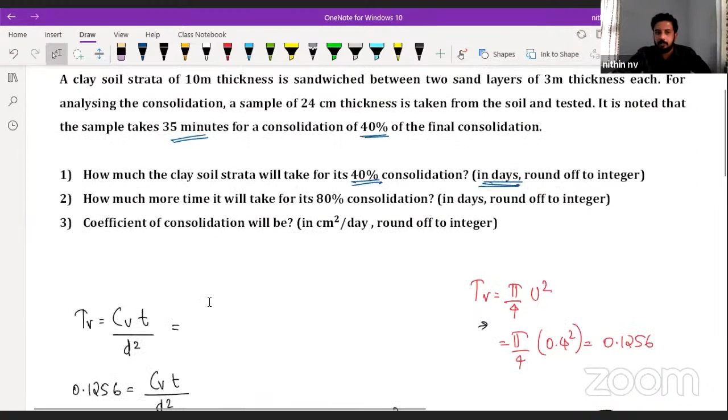190.52, correct now? Around 190.5. Okay, enough, depends on how accurate you are taking the values and all. Now, what is the question? If they are asking how much time it will take for 80%, then 190 is the answer.

How much more time will it take? We have already calculated 40% as the first question. Now for 80%, how much more time it will take? Calculate and tell me, 148.3 something.

Correct? Yes. So round off to integer, no? So everywhere you can round off to integer. This answer will be 42, this answer will be 148, like that. They will give a range. Don't worry, because log calculation, so many things are coming now.

Is it clear, guys? How you have to check the data, how you have to use the equations? Are you getting the confidence? Okay, yes. Now what is the last one?

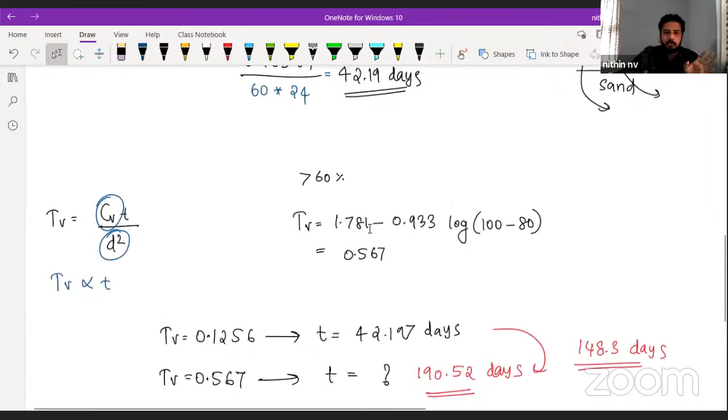Coefficient of consolidation, how can we calculate? Very easy, any equation you can substitute. Either you can substitute 0.125, then correspondingly you substitute what is the t, or you can substitute 0.567, correspondingly you have to substitute the t value. That is the only difference.

Clear? If you are putting 0.125, 1256, then the time will be 35 minutes. Correspondingly, d value will be 12. Or you can put the clay layer thickness also. Okay, any equation you can substitute. Whatever it is, you will be getting the same answer.

How much you are getting, you calculate yourself. Any t value you substitute, corresponding capital small t you substitute, corresponding d value you substitute, whichever equation you are using, finally you are going to get around 740 centimeters square per day. One second, no, 0.51 something you are going to get.

Everywhere we have centimeter and all now. Either you will get 0.5143 centimeter square per minute. So in 1 minute we have this much, then in 1 hour I will be getting this much, this much centimeter in 1 minute. Sorry, in 1 hour, this much centimeter in 1 day. So that will be equal to 740 approximately.

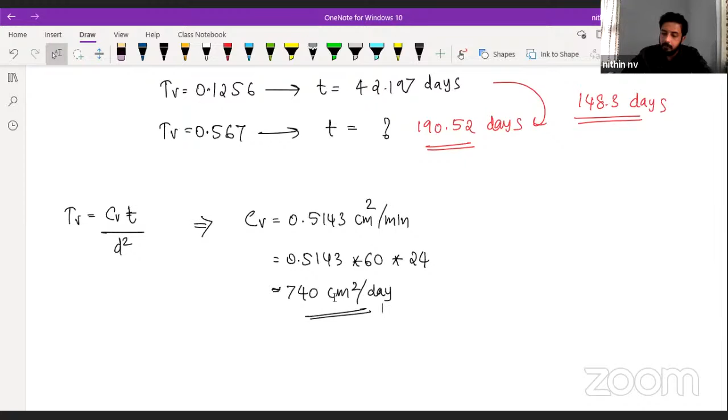Yes, is it clear, guys? Okay, now I want to give you one more question of consolidation that we can do in part 3. Don't worry, one simple thing I'm telling you. So we have a question here for distribution and all that I will give you in part 3 as the first question. Some point I'm telling you here just within 1 minute, then we can finish it off. Yes, very good, very good. All are getting 740 around?

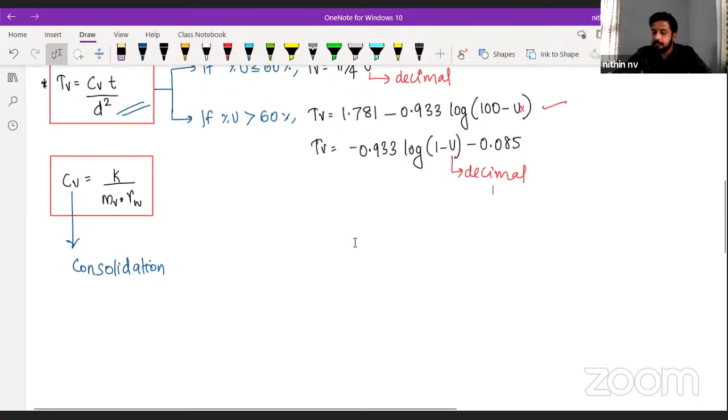Yes, good. Now see, they can ask you the immediate settlement. As of now, we have studied the consolidation settlement. Just some theory point I'm telling you can be asked for numerical. Just within 1 or 2 minutes, we can finish this. Okay, consolidation, one more question I'm going to give you, that will be in part 3. Part 3 will be our last session.

Okay, now immediate settlement, direct equation substitution, everything I have written here. The most important thing you have to check here is what is the E and mu, Poisson ratio and modulus of elasticity of soil. Just to confuse you, what they will give you a footing.

Okay, they will give you a footing, either circular, rectangular or anything, or strip footing they can give. Whatever footing they are giving you, they may give you the Poisson ratio of concrete of this particular footing. They can give you the modulus of elasticity of concrete also. Don't use that. Below we have soil, so we have to use the Poisson ratio and E of soil.

If you are getting confusion, you can just put mu s, or simply remember it is of the soil. We don't have anything for the particular footing, we don't have to take the E value and the mu value. The only thing we are taking for the footing is nothing but this B value. B value is nothing but the least lateral dimension. What do you mean by least lateral dimension? If it is a square footing, it is the width. If it is a rectangular footing, it is the width.

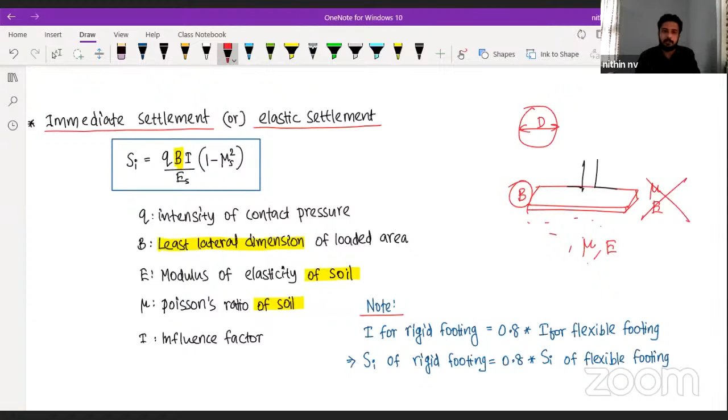If it is a square footing, same, only one thing. If it is a strip footing, also they will give a width. That's it. If it is a circular footing, then that is equal to diameter. Instead of B, we can substitute diameter. Understanding? That is the only thing you have to remember.

The other thing is Q. Either they can give some load value, some 1000 kilonewton. If they are giving some load value like this, area of the footing we have to divide, then put it as Q, intensity. Clear? Clear?

What is immediate settlement or elastic settlement? Both the names you should remember. They can ask you any name. The very important point is that only influence factor they will give in the question. Okay, don't worry, they will give.

One point you can remember, for a flexible footing, whatever is this influence value, for the same dimension of rigid footing, the influence value will be... okay, here I have 1 second. Okay, look at the first sentence. For the rigid footing, for the same dimension of flexible footing, I value will be less, 80% of that of the flexible footing.

So since I value is 0.8 times as that of the flexible footing, what they can do, they can give some elastic settlement of the flexible footing, and they can ask you what will be the elastic settlement of the rigid footing. What we can do, if I is getting decreased by 20%, or to 80%, nothing but 0.8, S value settlement also will change into 0.8 times.

Is it clear? Yes, Naresh, I will give, don't worry. Okay, PDF and everything we can give, don't worry. Understood? Elastic settlement, influence factor they may give.

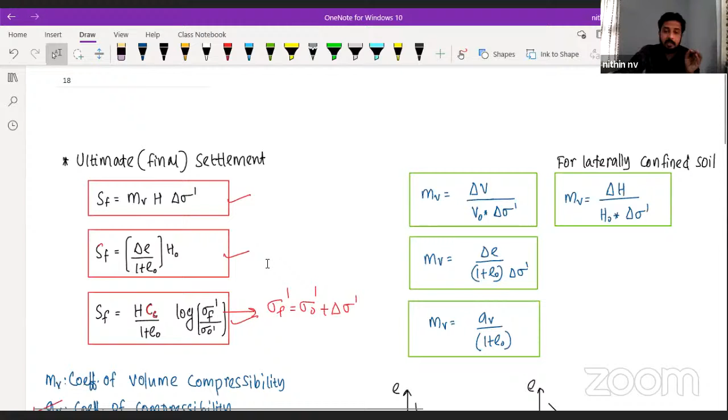Now, one more point I want to tell you regarding settlement and contact pressure under flexible footing and under rigid footing. That I can discuss. I told you one more question I have to do for consolidation. So after discussing that consolidation question, I will tell you how the contact pressure and settlement changes below a flexible footing and a rigid footing under sand condition and clay condition.

Generally, it's very difficult for the students to remember those things. Simply will remember, okay, don't worry. That we will discuss at the starting of part 3.

And in part 3, we'll see the slopes, stability of slopes, then the earth pressure theory we have to see, then the bearing capacity of foundation, pile foundation we have to see, along with the lateral earth pressure. So these things we have to see, the shear strength also we have to study.

One important thing I'm telling you, till this portion, consolidation also, that one question I will do in the third part. Till this portion, you just be confident till this much chapters. Around 60 to 70% marks will come from this portion.

Okay, if you are very much worried about shear strength or pile foundation, under reamed pile, those things, you can just keep that in the side. Don't worry. If you don't know that, it's okay. You will lose some 4 marks only. The remaining 10 marks you can easily score from this much portion.